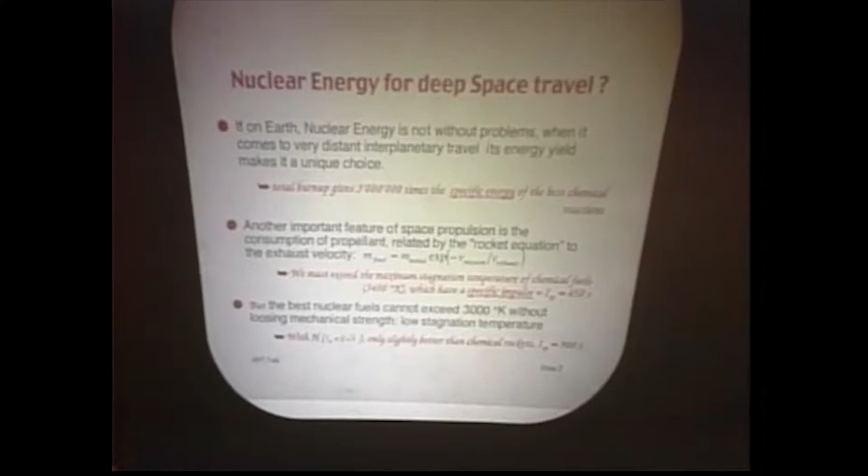Now, if you wish to make the jump from going to the Moon, 300,000 kilometers, to going on to Mars, where the round trip is 1 billion kilometers, you have to introduce some substantial change. You just cannot use the same technology over again.

And the real question is, can you use—this projector is not up to MIT standards. It's totally out of focus, and there's a lot of aberrations. Okay, now I'd say it's up to Harvard standards.

Anyway, the question is, can you use nuclear power? You can certainly convince yourself nuclear power is interesting in a certain sense because it offers 3 million times more specific energy than a chemical reaction when you burn it all. But energy is not the problem when you travel in space—what's important in space propulsion is impulse, momentum, speed. There's a famous rocket equation which determines how much stuff you can get there when you start with a certain initial mass. It's a simple equation containing the sum of the speeds you have to add for the various operations, divided by the exhaust speed of your gas.

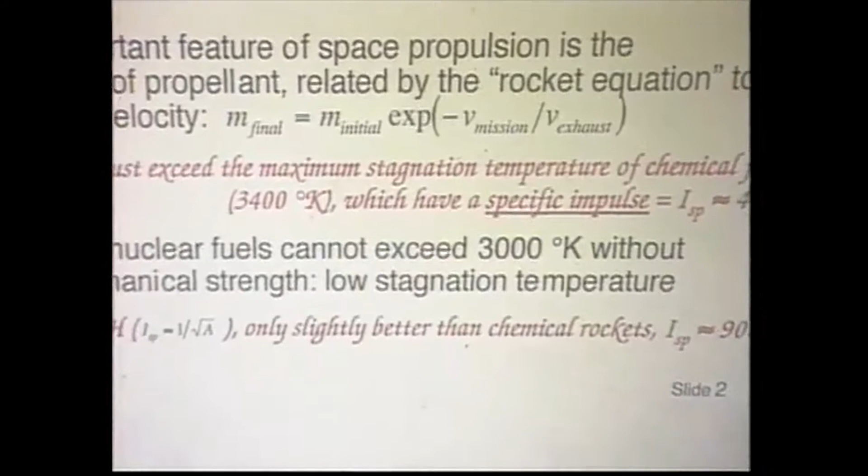That is essentially fixed by chemical fuels, which can reach a temperature of that order and provide a specific impulse of about 450 seconds. The specific impulse is essentially the amount of time, measured in seconds, over which a fuel will apply a thrust equal to its weight. So if I have a kilogram of a certain material and burn it, it gives me a kilogram of thrust for so much time, and that time is the specific impulse. So if you have a kilogram of chemical fuel, it provides a kilogram of thrust over 450 seconds, and that specific impulse is proportional to the speed of exhaust.

Now the idea is, of course, to go nuclear. But nuclear systems are limited in temperature — you cannot even get to the temperature of the gas, because your reactor materials cannot withstand such high temperatures. So you do it with a thing called NERVA, the machines developed in Russia and the United States, reaching about 900 seconds. But that's not because you have a higher temperature, simply because you're using hydrogen, which has a lower atomic number, so molecules move faster, giving you a higher exhaust speed.

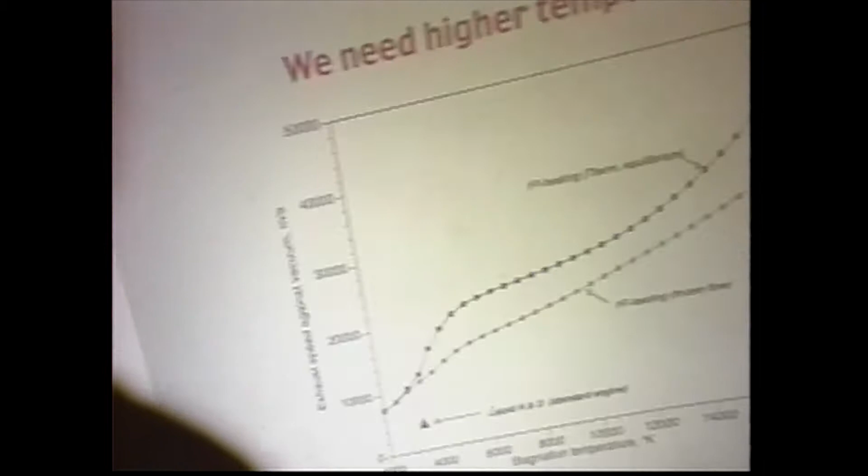This is a little bit the situation: if you look at the standard, here is the stagnation temperature at which your system is operating. Here is liquid hydrogen and oxygen, giving you an exhaust speed of about 4 kilometers per second, so a specific impulse of about 450.

We're talking about systems which should allow you to reach temperatures typically between 10,000 and 15,000 degrees, with hydrogen exhaust, giving specific impulses in the region between 2,500 and maybe 4,000. So we're talking about an order of magnitude improvement in specific impulse compared to a normal chemical system. A factor of 10 in speed means a factor of 100 in specific energy — let's be clear about that.

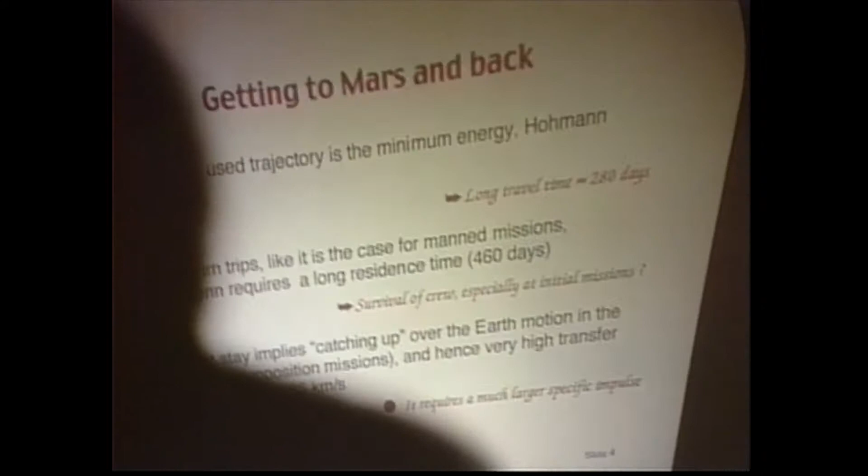That, of course, makes the situation much easier when you try to go to Mars. In fact, the most used trajectory is the so-called minimum energy trajectory, called the Hohmann trajectory, which was proposed initially in the original document, the book I mentioned before. The travel time is long, 280 days. It's essentially a free-fall trajectory, as you'll see in a minute.

However, if you get there and want to come back, you have to make sure the planets are in the right place, which means adding another 460 days residence. So it's a fixed trajectory: you travel for a year, stay there a year and a half, then come back for a year. If you miss the opportunity, things aren't in the right place and you don't get anywhere. Now if you want to go a little faster with this, you have to...

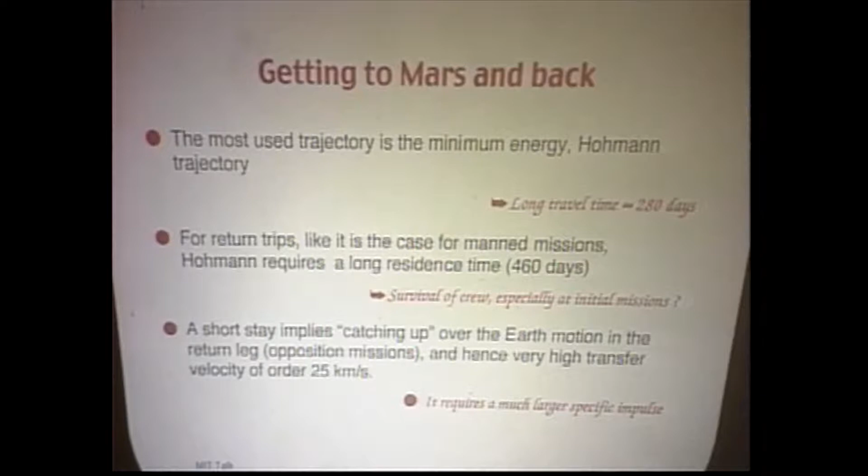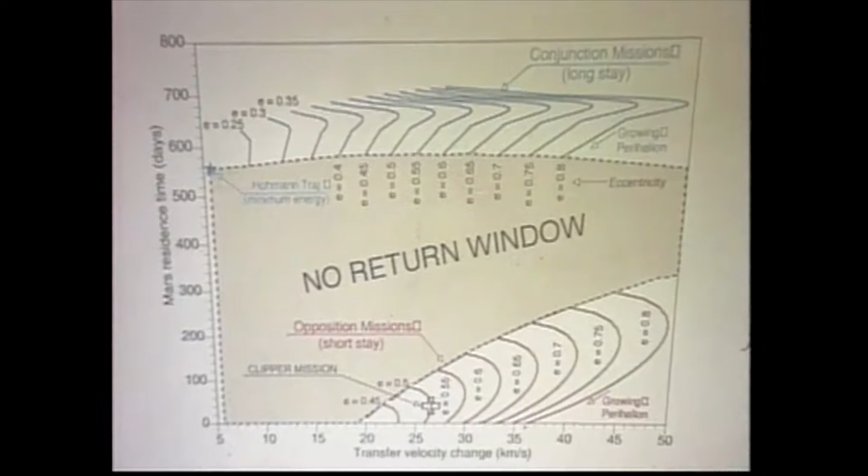If you want a much shorter mission, you have to use an opposition trajectory — in other words, you have to run after the Earth, which is escaping away from you. That implies you have to go to much faster speeds. This is the area which is permitted; there's no other way in between. So if you have very slow motion, 5 kilometers per second, you'll be forced into the long trajectory. If you want to stay there for less time, you're obliged to go to transfer speeds which are quite large, 25 to 30 kilometers per second.

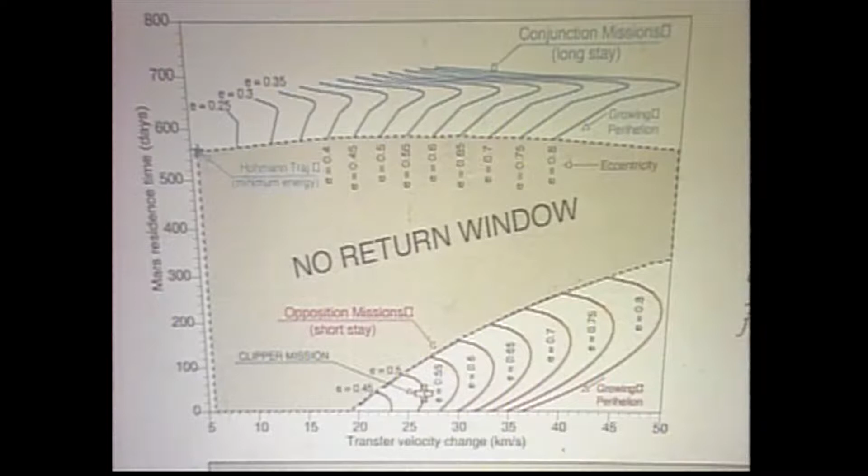Which implies, of course, speeds of your ejected gas of the same order of magnitude, and therefore you require new methods. We are talking about missions of this type for the manned clipper missions, and missions of that type stay there for the case of transporting materials. Now, let me show you briefly how this mission can be realized.

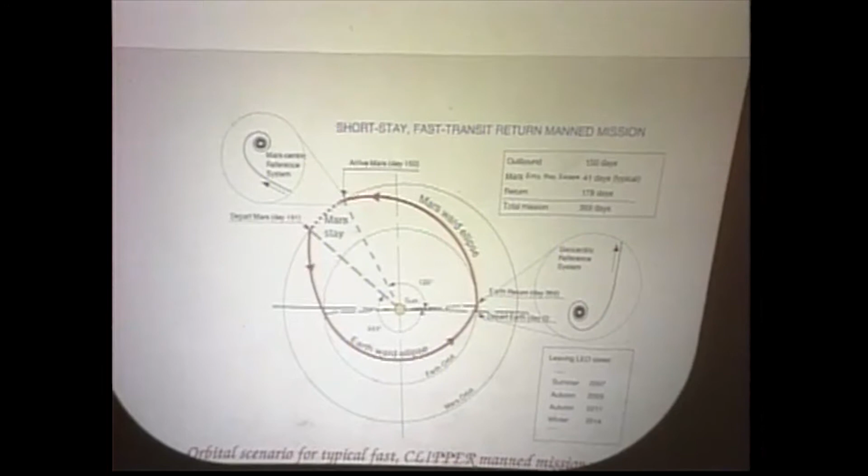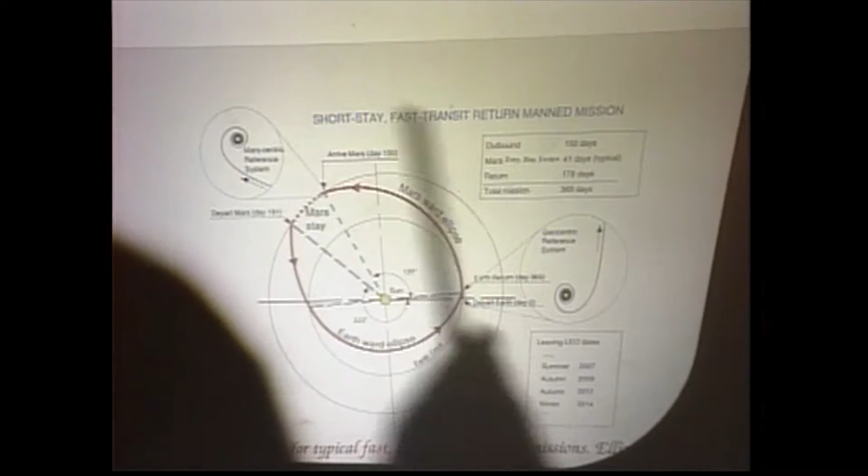The fast mission consists of leaving Earth here, running on this trajectory, and getting here after 150 days on Mars. Then you stay on Mars as long as you wish, from 0 to 100 days or whatever is required. Then you decide to come back. This time Earth has gone further, so you have to catch up the Earth position, running much closer to the sun and then making a turn inwards. That allows you to get back in something like another 179 days. So you can close the whole thing in a year, but it requires much higher speeds.

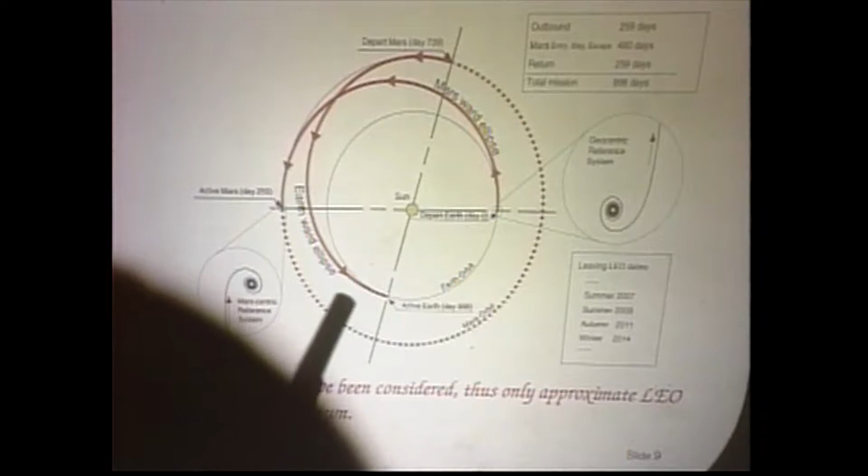This is for the people who want to get there. Now if you want to send equipment, as you probably need anyway, you can follow the Hohmann trajectory, represented here. You can see what the Hohmann trajectory is all about—it's a half circle. You start here, you go in 280 days to Mars, 260 days. Then you have to stay all this time until the Earth is in the right position. Then you leave here, and go another Hohmann trajectory back, 180 degrees, and you hit the Earth where it belongs. That's the long time trip.

Now we are trying to study all kinds of different missions with the potentialities of this new engine, which I'll describe in a minute. Essentially, nuclear power is going to be used only for the transplanetary trip. Classic methods for landing and takeoff, so you use standard fuel to get to orbit and then to come down. Air braking is being removed at this level—it's an extremely complicated procedure. Imagine you arrive on Mars and then have to get into a sort of orbit which is slowing down into the gas of Mars, and the window is very narrow. The difficulties of doing that are considerable. In fact, many of the problems in getting Mars material come from that point. We think that with people you should avoid it.

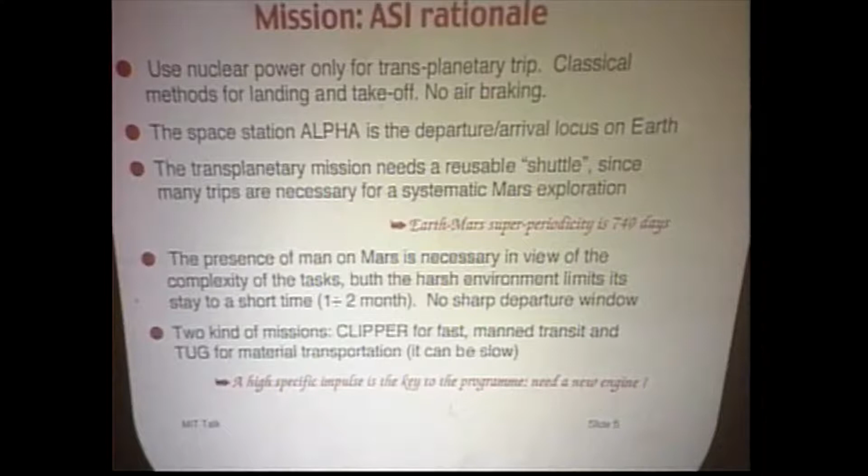The Space Station Alpha is used as a departure point. The transplanetary mission needs a reusable shuttle, since many trips are necessary and could be necessary. This device will operate on a periodicity of Earth-Mars orbits, which is 740 days. The question is the presence of man on Mars—so man is necessary for the complexity of the task, but the harsh environment limits the stay to a short time. It's inconceivable that you could leave a person on Mars for the first time for 1.5 years, eventually to make his own fuel and come back and so forth. So he has to be able to go there to get the equipment going, but then he has to come back, and you need no sharp departure window.

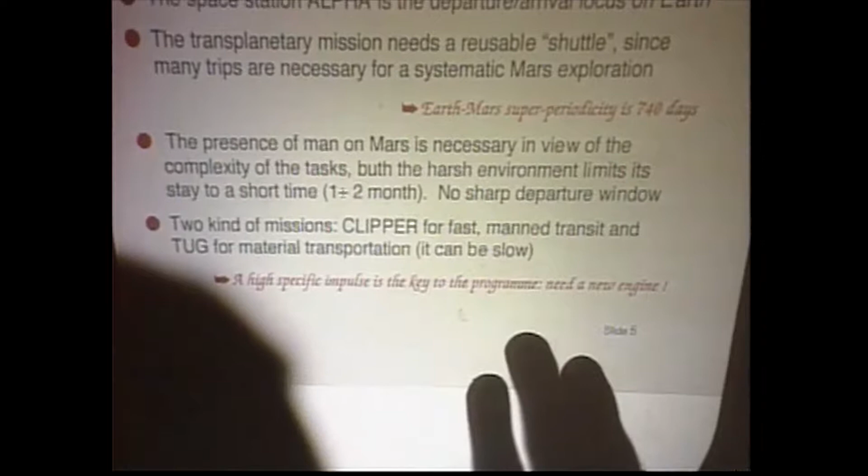And then you have two kinds of missions: the clipper for fast manned transit, and the tug for material transportation, which can be slow. And the key, of course, to all of that is a higher specific impulse.

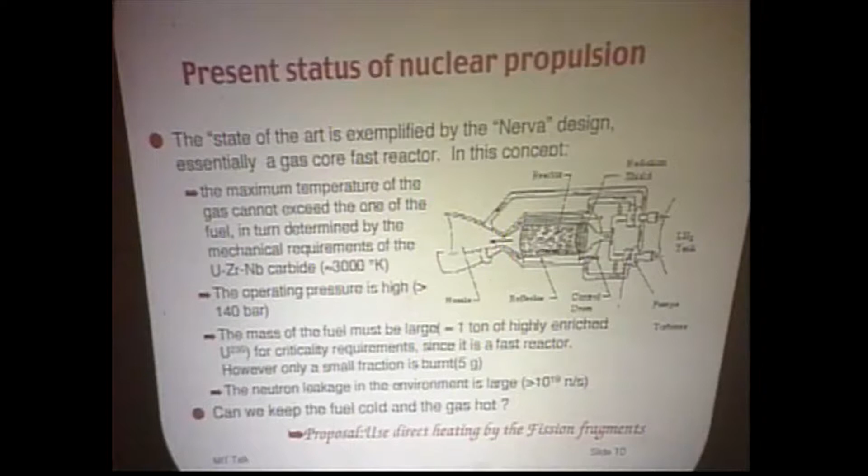Now the present state of nuclear propulsion is not a very good state. Essentially, NERVA is the design which is now the best in town, and it's essentially a gas core fast reactor. The maximum temperature is determined by the temperature of this uranium, zirconium, niobium carbide, which has to remain solid. It runs at high pressure because the gas has to go from here to there. Here is the low temperature, here is 3,000 degrees, so it has to warm up going through the rods of the reactor. So high operating pressure—the mass of the fuel must be large. It's 1 ton of highly enriched uranium, which has to be put into orbit in order to get criticality.

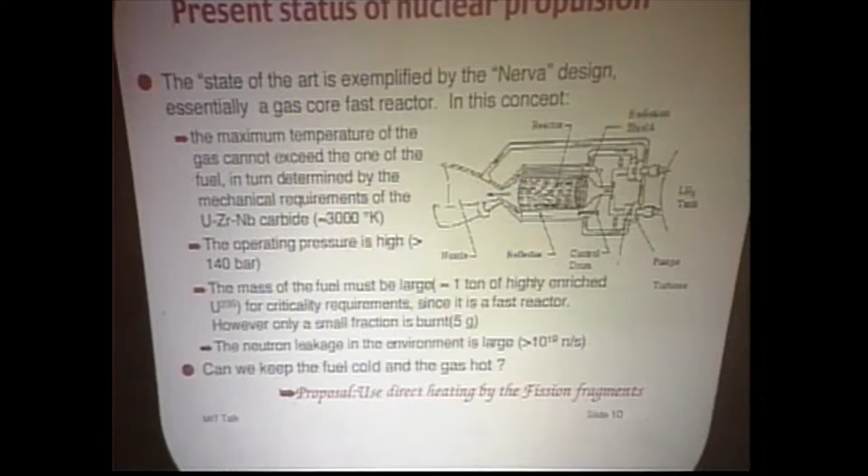But however, during the burning of this whole system, only 5 grams are burnt. The rest just goes there—you have to deliver it, get rid of it. And many people get very nervous when you put a ton of highly enriched bomb-grade uranium into orbit. Neutron leakage is very large, 10 to the 19 neutrons a second, so it makes it very hard for people to stay around. They have to be shielded, and even if they get shielded, it's not trivial—you can't avoid that kind of irradiation from these fluxes.

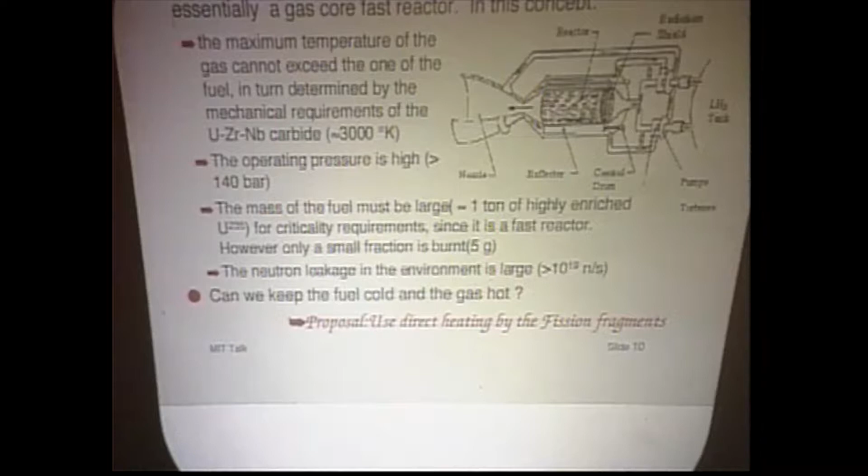The real problem is that essentially the fuel is, in fact, the hottest part in the system. Now the basic idea is, can we keep the fuel cold and the gas hot? That's what you would like to do.

The answer to that is a very simple idea, which we are working on: direct heating by the fission fragments. Let me remind you that 88% of nuclear energy due to fission is carried by two fission fragments, the rest being additional neutrons and gamma rays. You have essentially uranium-235, you swallow a neutron.

The uranium-235 starts to vibrate, to move. It separates like 2 drops of water. You get 2 little droplets. They're both positively charged, therefore they repel each other. No longer are nuclear forces present because you have severed the connection between the two. And the 200 MeV you recover is just simply the Coulomb repulsion of these 2 parts. So 2 fission fragments come off and they carry essentially 88% of the total kinetic energy.

So why not use it? In addition, there are a few gammas and neutrons, but they carry only a few MeV. So most of the energy is carried by these 2 fission fragments, which are back-to-back, so to speak.

Now the question is, how can you make use of that fission fragment directly? They have an enormous enthalpy inside, they represent tremendous high temperature, but you never see them in a reactor because they stop in the reactor, and you just get warming up of your material. You don't get access to that beauty that nature is providing you with.

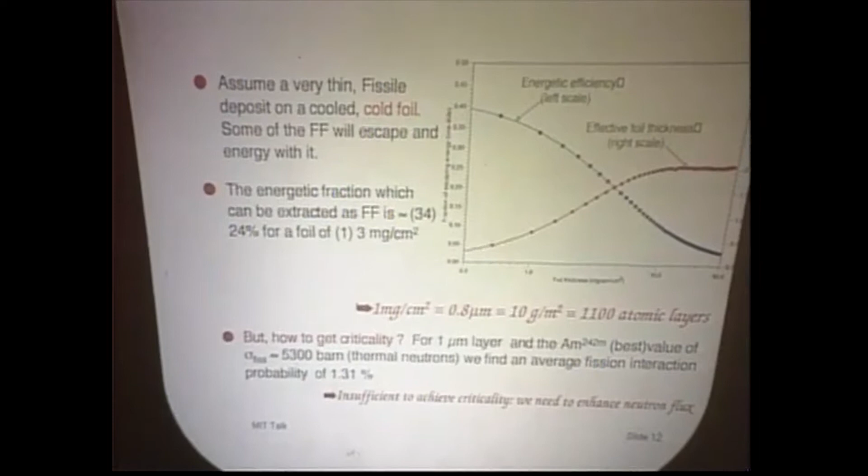So we assume a very thin fissile deposit. Let's take a foil, put on it a layer of fissionable material, and make it thin enough so that the fission fragment can come out. Then see what happens as a function of the thickness of the foil.

Here you have a plot which shows 1 micron, 1 milligram per square centimeter, 10 milligrams per square centimeter. This foil is made out of uranium or americium or whatever you want. And you see here the energetic fraction of energy coming out.

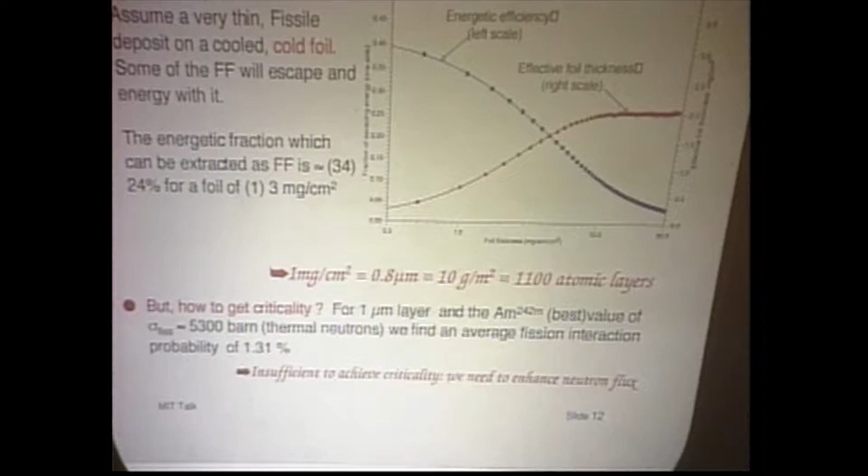Obviously, you get 44% if you had 0 thickness, because 88% is fission fragment, 44 going one direction and 44 the other. Then when the thickness becomes bigger, you get a loss. For instance, if you have 1 micron thickness, you get 34% instead of 44. If you go to 3 microns, milligrams per square centimeter, you get 24%.

Now, what are we talking about here? We are talking about 1 milligram per square centimeter, which is 0.8 microns in thickness, which is 10 grams per meter squared surface, and we're talking about 1,100 atomic layers. This is certainly not what you call a nuclear fuel. A nuclear fuel is a very heavy material, hundreds of tons of stuff inside the system. Here it's rather a radioactive source, if you like, deposited on a thin layer.

Now, how do you get criticality? For that, you need to do some clever things which have to do with neutronics. Let me anticipate to you that I do succeed in having criticality with that little bit of americium.

Now, let me be clear about numbers. If I take this americium, which has the largest fission cross-section known around, 5,300 barns, and you get neutrons through that, it has 1% probability of interacting. Obviously, you'd like to have 100% probability of interacting to keep the reaction going, and therefore you need about a factor of 100 enhancement. So can you enhance the neutron flux with some kind of storage device so that you can get the neutrons over and over again through your americium foil, and enhance this way the probability of fission?

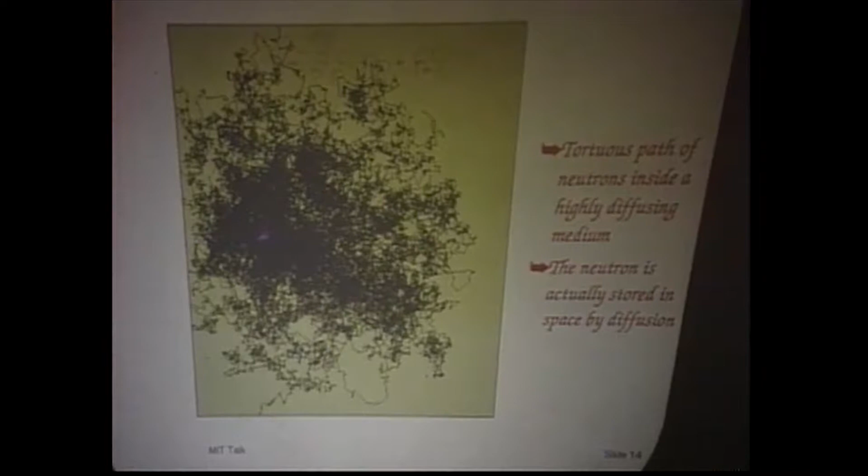The answer is yes. We've done lots of experiments at CERN on that, and in fact this is not just a theory, it's experimental results. The basic idea is you take a highly diffusing but neutron transparent medium, and you let a neutron travel in it. Only elastic cross-section is there, no inelasticity. So this neutron moves around inside this material in the same way that an electron moves in an argon gas.

The physical reason is very similar. Normally, you're talking about nuclei which are double magic - we have here the great experts for these things. A double magic nucleus is like a noble gas, the shell is closed. So in the same way an electron cannot be captured in argon or helium and will go around as a free electron forever, here we're talking about the nucleus - the neutron will not be captured by the nucleus because the shell is closed. The cross-section is very small, and the result is this thing will just go around.

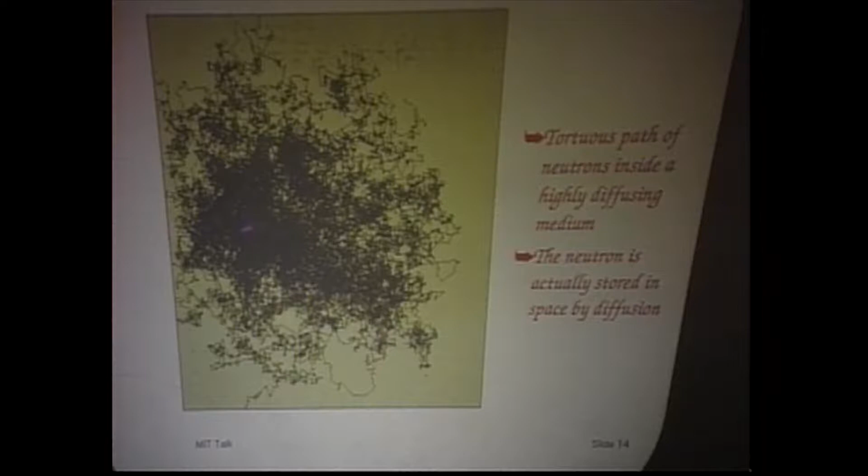Look here, there's a single tortuous path inside the highly diffusive medium. This is computer simulated, but reality is not any different. The neutron is essentially stored not like in a storage ring, it's stored by diffusion. It's a random process, but effectively it keeps the neutrons together. It has been shown that a 60 meter long path is wound into 35 centimeters, 1 foot in length, and this is due to the fact that this movement is random.

Now, in such a storage medium, you have a volume of this type of high purity graphite or high purity lead. In that volume you have this phenomenon. In such a storage medium, because of multiple trials, even a very tiny amount of impurity can absorb a significant amount of capture elements. Suppose you have a ball full of water, and you put there a little bit of ink, just a little drop of ink.

The whole box will have the color of the ink, even if the amount of ink is infinitesimal, because the water is transparent and the ink is highly absorptive. Sooner or later, light will find the molecule of ink and send back the color you put in. Same thing happens here - you have a very small amount of impurities inside this medium, and because you go around and around over and over again, you'll eventually hit an impurity, and you get a factor because of this multiple trial effect.

And therefore, 20 grams of americium inside that box will make it critical. So now you can make devices which are critical with grams of material, not kilograms. Remember, in the NERVA you needed 1 ton of highly fissile bomb-grade uranium. Here, with 20 grams of americium, you're critical in this continuum medium.

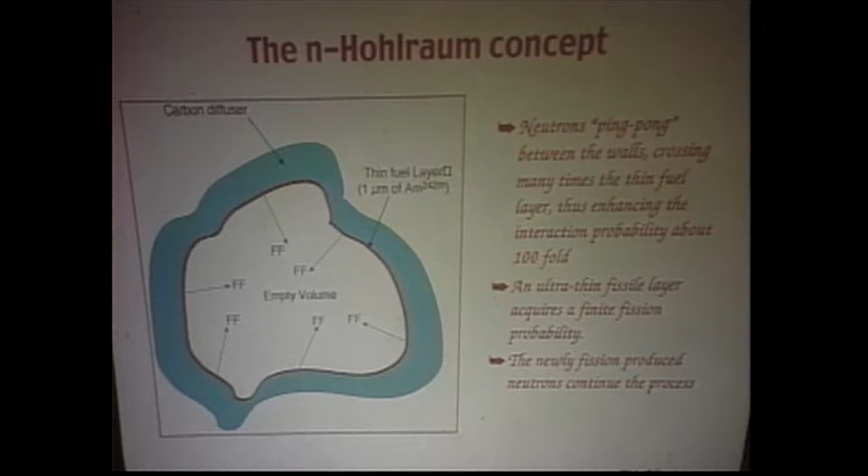Now, of course, you don't want to have a continuum medium, you want an essential way to do this fission. So we introduce a statement which we call 'Hohlraum,' because it reminds of a black body - essentially a box made with high purity carbon diffuser, on which walls you put a thin layer, 1 micron, 1,000 molecular layers of americium. Then neutrons will ping pong between the walls of this container, traverse the walls many times, and it will enhance the interaction probability, as we'll see in a minute, about 100 fold.

And the ultra-thin fissile layer acquires a finite fission probability because of these many traversals, and the newly produced fission neutrons will get thrown back into the box, and it will start again. More precisely, we assume the empty cavity is covered with a layer. The configuration is similar to a black body radiator. Let me remind you, for a black body radiator the flux is uniform independent of the shape, and the flux is determined essentially by the properties of the material, not by the geometry. The same thing will also happen here.

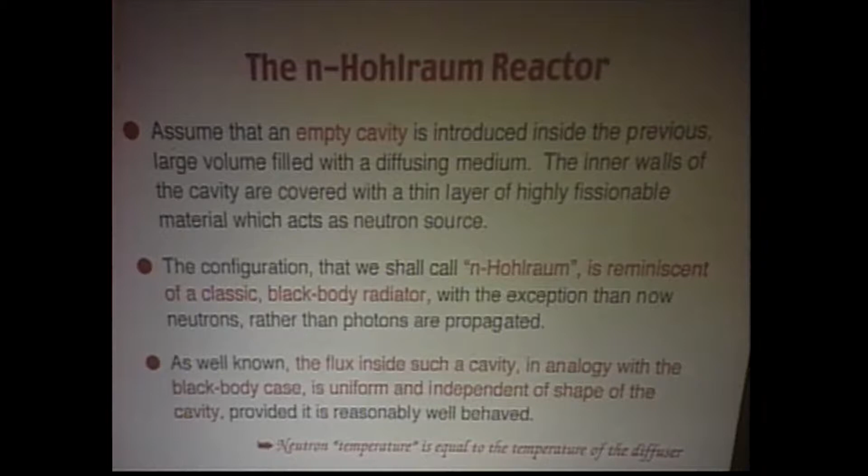It's uniform, independent of the shape of the cavity, provided of course it's well behaved, and therefore it doesn't matter what the shape is, you will get this result. Also, the neutron temperature, and therefore neutron energy, will be related essentially not to the fuel, but to the quality of the container. So the temperature will be fully thermalized with the temperature of your container, and you'll know very precisely what energy neutrons you're dealing with. And of course, no neutron will come out, because being a black body, it will contain the neutrons inside - if they're inside, they're not outside.

Now, the theory of enhancement can be easily done. I won't spend much time on this. It tells you that if you have any shape, take the reflector away, then put it back with the same source, the enhancement of flux because of the reflector is equal to the square root of the elastic scattering divided by the capture cross-section. Scattering elastic is typically 10 barns, capture cross-section is on the order of millibarns, so we're talking about a ratio of 10 to the 4, 10 to the 5 between the two numbers. When you take the square root, you get good results.

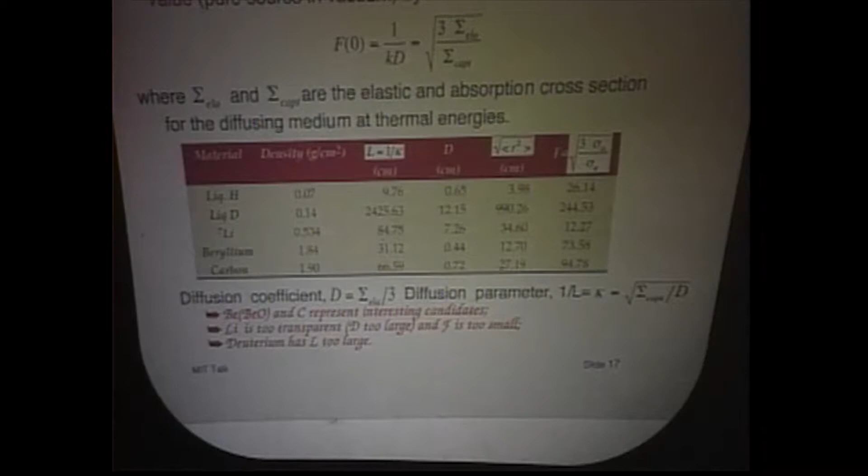There are two important parameters here. One is the diffusion length, which means the size of your sphere of containment, the thickness of the walls needed to do the job. The second is the enhancement factor, by how much you increase the flux.

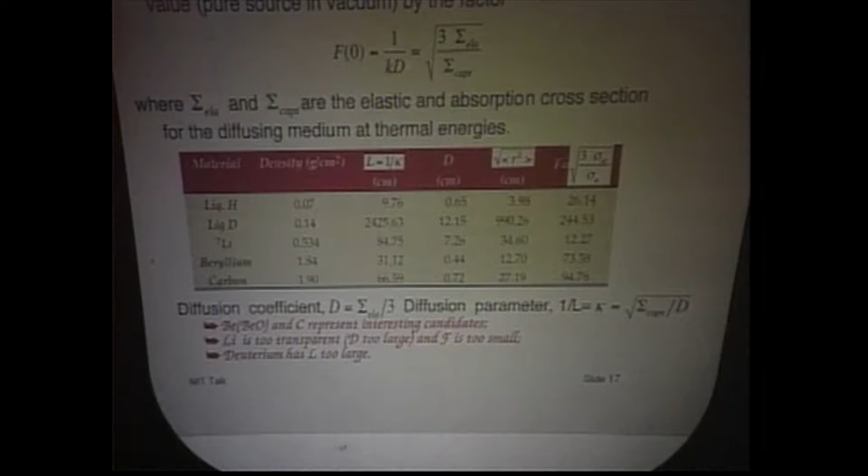If you use graphite, you get 27 centimeters diffusion length and 94 enhancement. Beryllium works fine too - it's much smaller, 12 centimeters, but the enhancement factor is only 73. Lithium is completely transparent. Liquid deuterium gives an enormous enhancement factor, but also a very long diffusion length, so you'd have to build a huge device - not practical. Liquid hydrogen is also excluded. So essentially you end up with beryllium, beryllium oxide, and carbon as the interesting materials.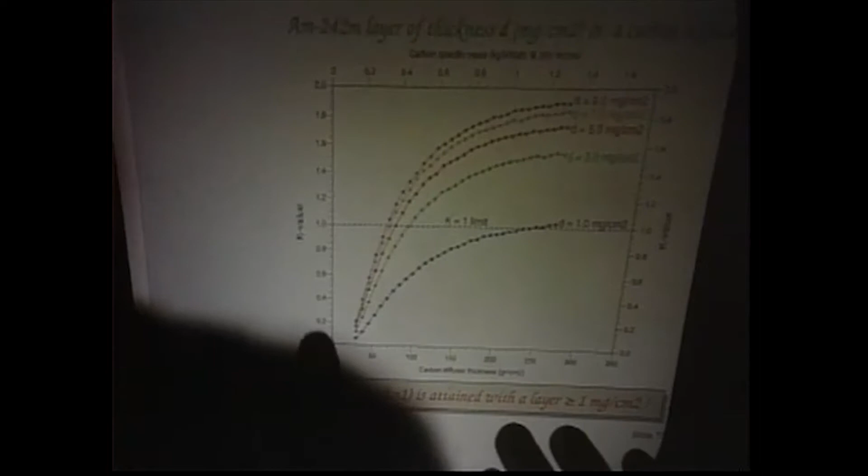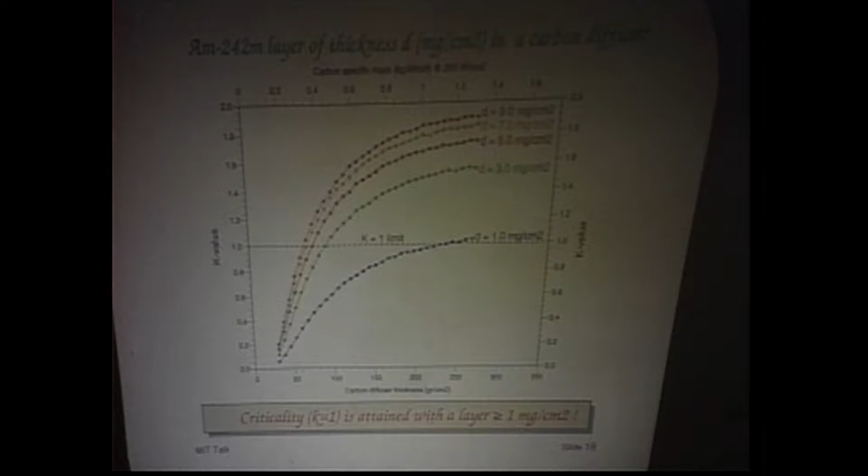But if I go to 3 milligrams, you see I'm already at 75 grams per square centimeter, which means about 35 centimeters - that much. This is 22 centimeters, about what you'd encounter flying over the Atlantic. That's 22 centimeters, so it's quite a reasonably small amount of reflector.

Beryllium oxide can do it even better - criticality is obtained with layers of only a few milligrams per square centimeter. So it's possible with this technology to make a critical reactor operating with a very small amount of material. Remember, 1 milligram per square centimeter is 10 grams per square meter of surface. We're talking about probably 100 square meters for this mission, so between 5 and 10 kilograms of americium to burn, which is not very much.

In fact, americium has the same property as uranium-235. Plutonium-238, used now on the Cassini mission and on Voyager, usually had more than these kilograms on it. So it's déjà vu, as one says in French.

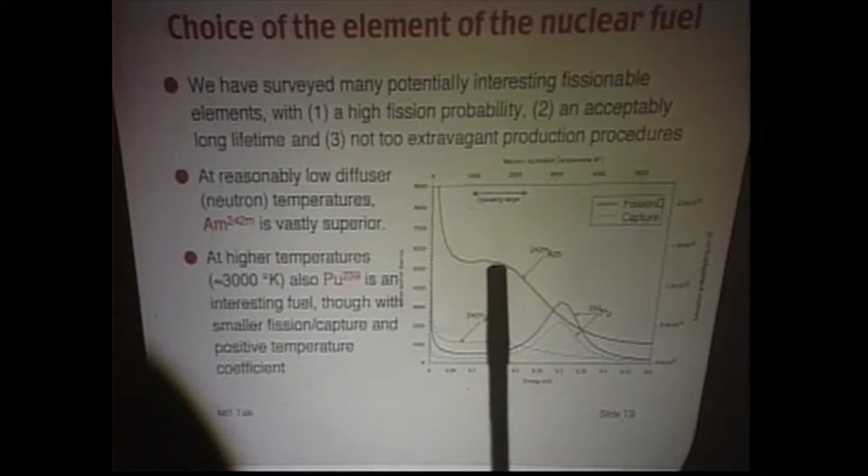Now, quickly, which fuel element should you use? You need a high fission probability, a reasonably long lifetime, and not too extravagant a production procedure. Americium-242M is an ideal candidate. This is the cross-section - notice it drops as temperature goes up. This is the temperature of your whole run, 1,000 degrees, 2,000 degrees, so you're operating in this region corresponding to those energies: capture very high, fission very high, capture very small - a big ratio between the two.

The other element, not so bad, is plutonium-239, which has a well-known resonance at about 0.24 electron volts. That could be used if you built a container with a high temperature, on the order of 3,000 degrees. In that case you could also use plutonium, but you'd have a problem with the temperature coefficient - though there's a nice negative temperature coefficient here because of this cross-section. So plutonium is the second choice, americium is the first choice.

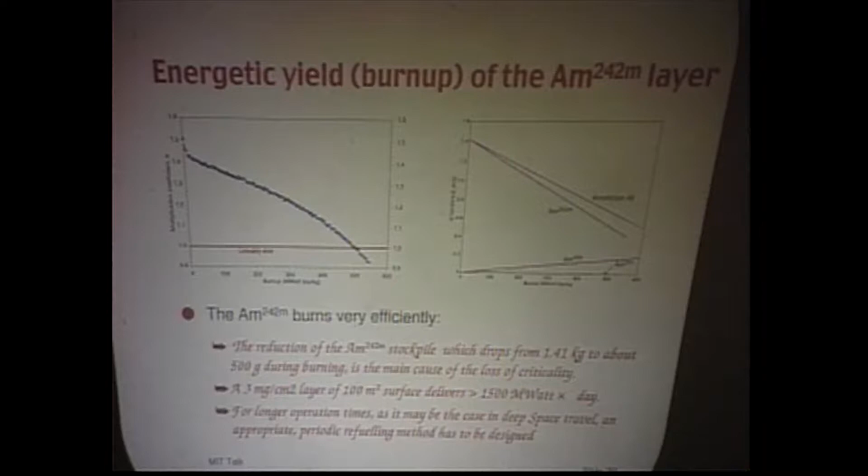So I've done a very complete burn-up analysis for a reactor of this type - I won't spend time discussing it in detail. Here is what happens when you take 1.4 kilograms of that americium and burn it: you can achieve a fairly long burn-up.

Burn-up means megawatt-day per kilogram. This means 1 kilogram will give you that many megawatts for that many days. So 1 kilogram here will give you 400 megawatts for 1 day, or 1 megawatt for 400 days, which is much bigger than what you get for a normal reactor.

In a normal reactor, you get a burn-up of 20, 30 in those units. This essentially comes from the fact that the system is much more efficient when it comes to burning.

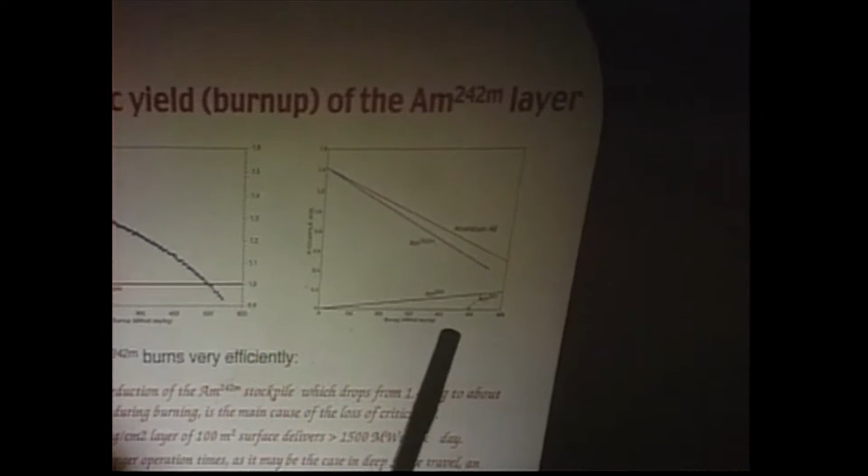For instance, here you can see during this 500 megawatt-day per kilogram, the americium coming down from 1.4 kilograms to about 0.5. Americium being burnt, americium-243 produced by the captures, since it's a clean situation, and here it stops because it gets below critical.

And so you can get a lot of energy out of this. You can burn about half, even more than half of your americium can go. And 3 milligrams per square centimeter layer delivers that much power.

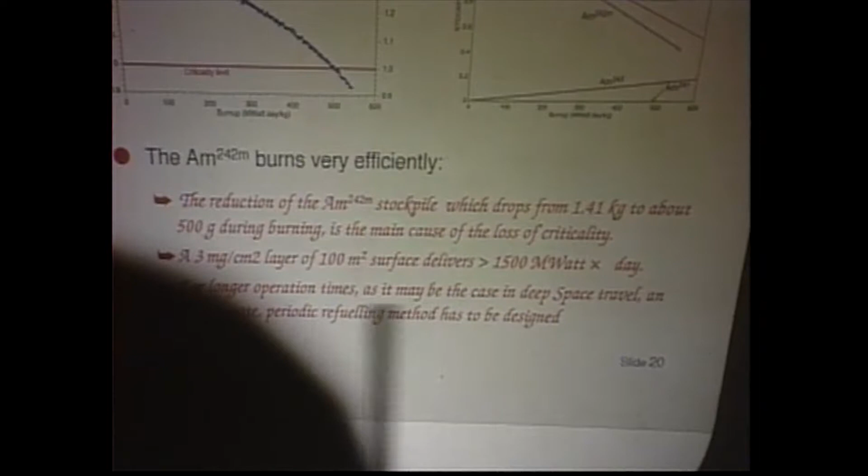And of course, if you want much longer operation, you have to remake your layer. It's a very thin layer. It can be deposited in some kind of a way. The whole technology has to be developed. But obviously, periodic refueling may have to be envisaged eventually.

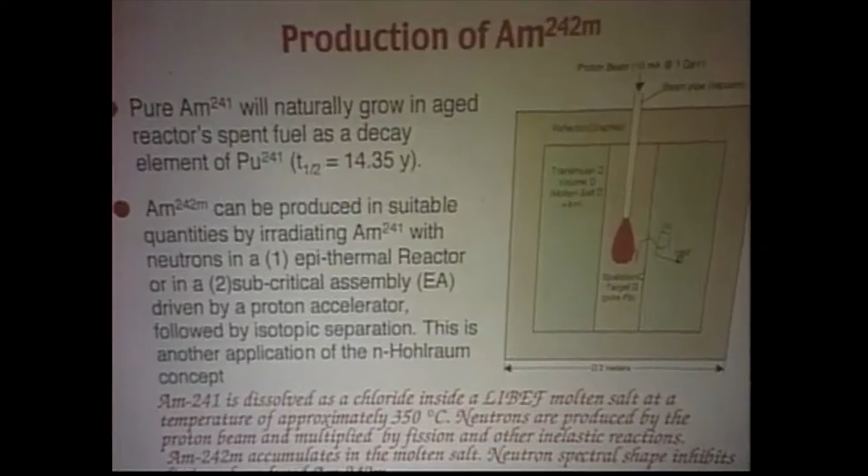Now, how do you produce the americium very rapidly? Well, essentially, you start from americium-241, which is naturally grown in aged reactor spent fuel. Plutonium-241 has a lifetime of 14 years and goes into americium. And then you make a neutron capture.

And here is explained how you do the neutron capture. And then you get an extra neutron, and you end up to 242M. 242, not M, is not stable. And so the only thing left is that one.

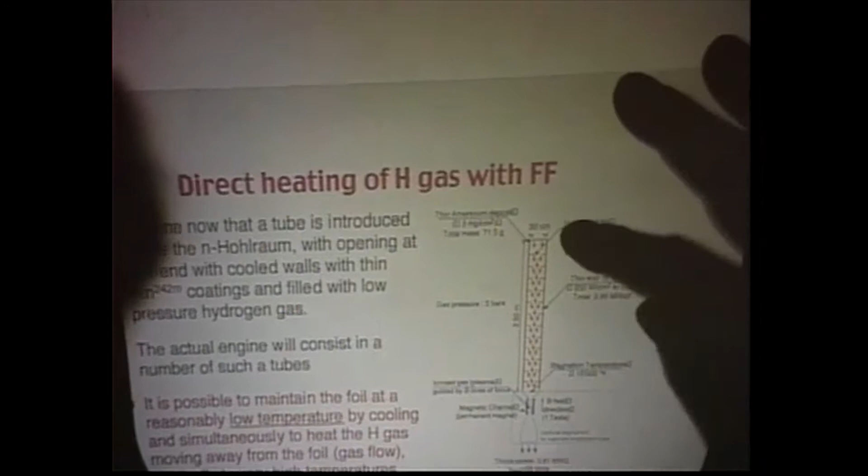So let's come back to the question of heating of the gas with those fission fragments. Let's assume we have a tube, typically 2.5 meters long, 30 centimeters in diameter. This is like a fuel rod in a reactor. Only a fuel rod in a reactor is full of material, and the cooling is outside.

Here we are talking about a fuel rod which is empty. And the fuel, instead of being deposited as a volume, is deposited as a surface inside. And then we get gas in, and the gas goes through this thing, and it gets heated up. Let's see what happens here.

You have a tube, 30 centimeters in diameter, in this particular case 2.50 meters long. There is a thin wall, which is cooled from liquid from outside, and produces 2 watts per square centimeter of heat, and produces 3.95 megawatts of power. This rod is immersed, as you will see, in a lithium bath.

On this wall, there is americium, 3 milligrams per square centimeter. The total mass is 71 grams, so it's not very much. And there is a little bit of gas flowing through the system, 1.2 grams per second, so 58 micrograms per square centimeter, so it's very slow flow gas. The whole thing is taking 1 gram of gas per second.

And the gas is flowing very slowly. It leaves the wall, it departs from the wall. When it departs from the wall, it warms up. And when it comes down here, you will see from exact calculation, it has temperatures of the order of 10,000, 15,000 degrees. And in fact, the wall is cold, and the gas is hot.

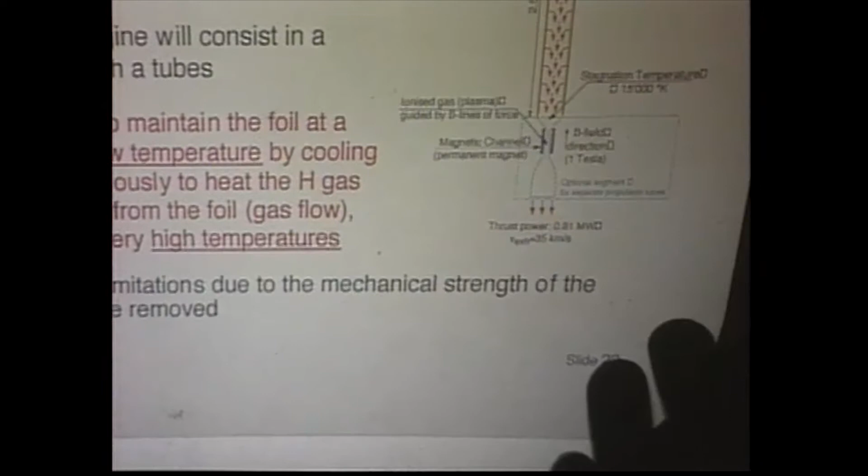So it's maintained, this is my statement, maintained the foil at a reasonable temperature, cooling from outside the wall, the sheet, the foil, and the gas is moving from the wall, and when it gets in, it gets hot. And by the time it comes down there, it goes between 10,000 and 15,000 degrees.

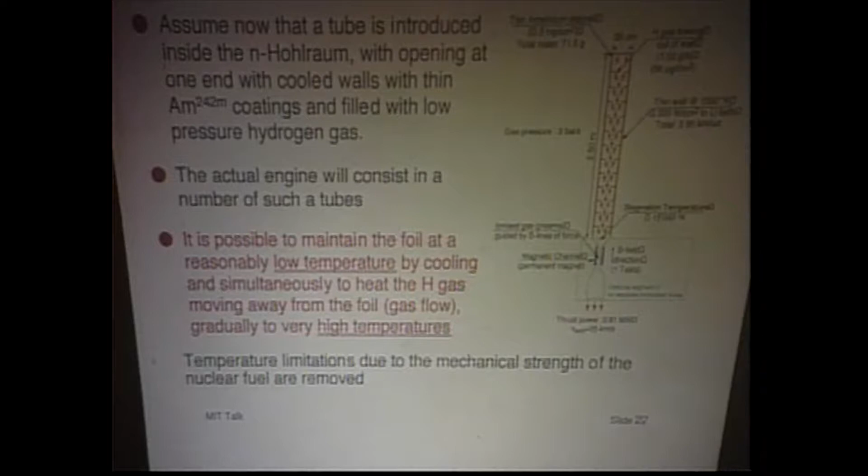And see now which limits there are and how can you get there. Now, temperature limitation due to mechanical strength of the nuclear fuel are removed because the fuel is cold and the gas is hot. Now, there are several gifts of nature in here which are worth reminding you.

First of all, the range of the fission fragments exiting from the 3 milligram material can be calculated for the actual Z and A distribution. And it turns out that the specific ionization per unit of mass in hydrogen is much greater than in americium. There is almost a factor of 20 higher specific ionization loss in hydrogen with respect to americium.

What is due to that? What's the cause of that? The cause is the following: ionization losses only work when the particle traveling is faster than the electron bound in the atom.

And the fission fragment has beta equal 0.04, 4%. So many of the electrons bound in the americium foil have a speed which is higher than the speed of the fission fragments, and therefore they are essentially not participating in the ionization loss.

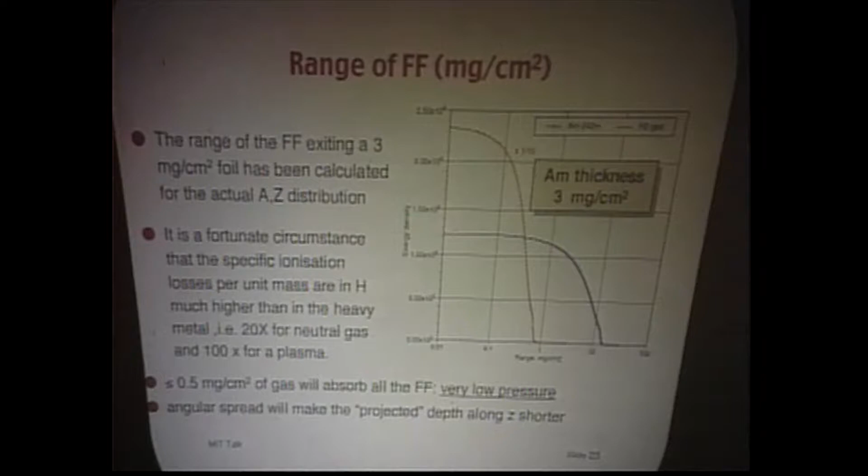Which is in fact extremely important. So even half a milligram per square centimeter of gas will absorb the fission fragment completely. So you can operate with very low pressure. Actually, in reality, the fission fragment goes in all possible directions, so the range is only the upper limit to the travel.

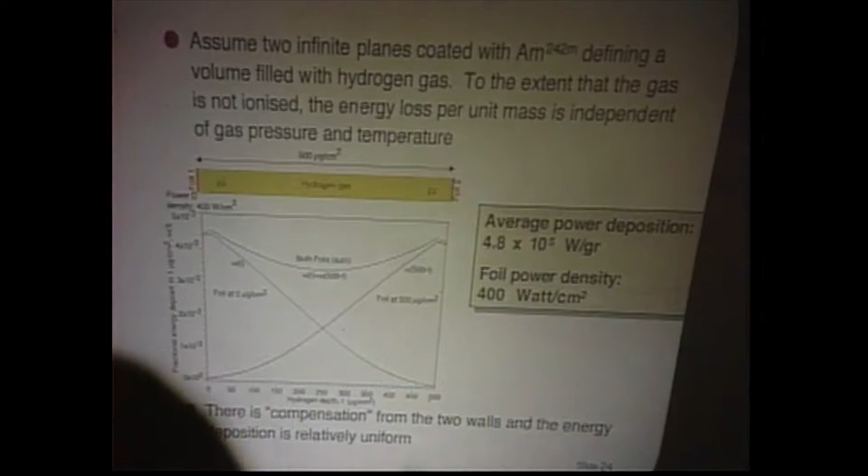So let me take two infinite planes coated with americium, defining a volume filled with hydrogen gas. So you have two planes here, and these two planes are now filled with gas. The fission fragment traversing it, the thickness is half a milligram per square centimeter, so it's about 20 centimeters, 3 atmospheres, just to get ourselves understood, even at high temperature.

This is the kind of heat produced by the wall to the left, and this is the kind of heat produced by the wall to the right. When you put them together, you get a reasonably flat distribution. The important number here is this simple one-dimensional drawing, which will in fact be worse than the case of the tube, which I'll discuss in two dimensions in a minute.

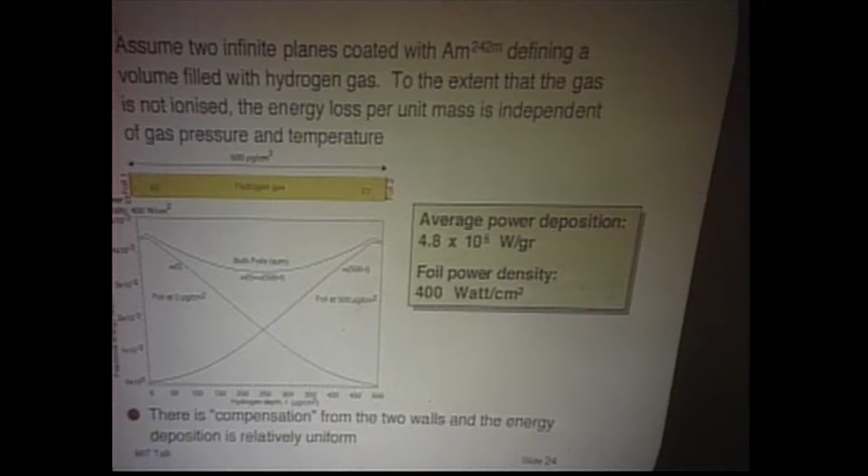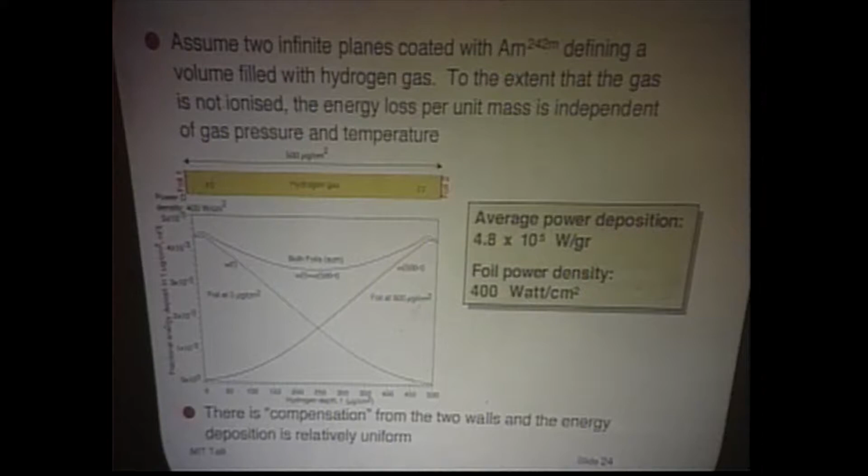With 400 watts per square centimeter on this foil, you get about half a megawatt per gram in the gas. Now a megawatt is an enormous power. A megawatt in a gram is just putting a megawatt on a mosquito, and obviously if you put a megawatt on a mosquito, it will fry very rapidly. Therefore, the idea is that you can keep the foil under very normal conditions of a reactor, but get a real hell inside the gas.

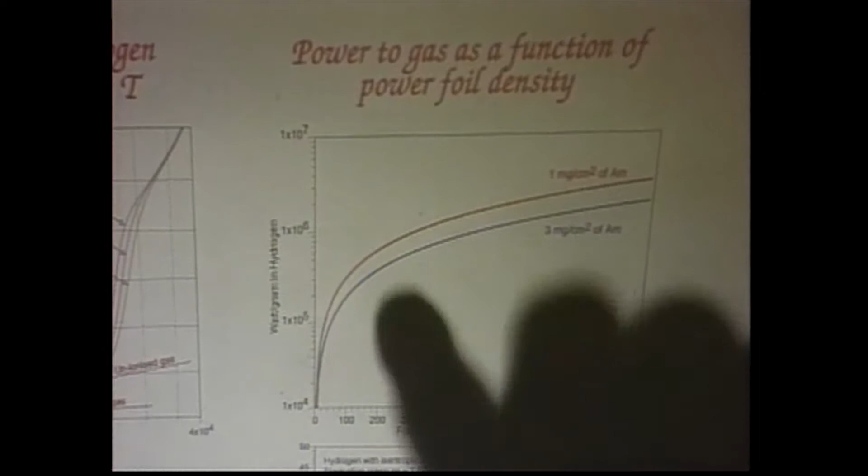This is the kind of region in which a normal reactor is operating. And you can see that you can go all the way up to about a megawatt per gram in the gas with reasonable heating on the walls.

And that is, of course, transformed into temperature through the enthalpy diagram for hydrogen, where you have enthalpy, 10 to the 5, 10 to the 6, in joules per gram, and temperature here, 10 to the 3, 10 to the 4. Now you have to pay a little attention to this curve. Up to 3,000 degrees, the enthalpy is rising linearly. This is a perfect gas: enthalpy, specific heat is constant. It's essentially the temperature of single hydrogen molecules.

At about 3,000 degrees, the molecule dissociates, becomes atomic. Then you get the enthalpy to do the dissociation - that's like a chemical reaction, you put energy into it, eventually it comes back after you've done it. Then you start with another slope, which is twice as sharp, because you have twice as many atoms there, and therefore a higher specific heat contained for a given gas.

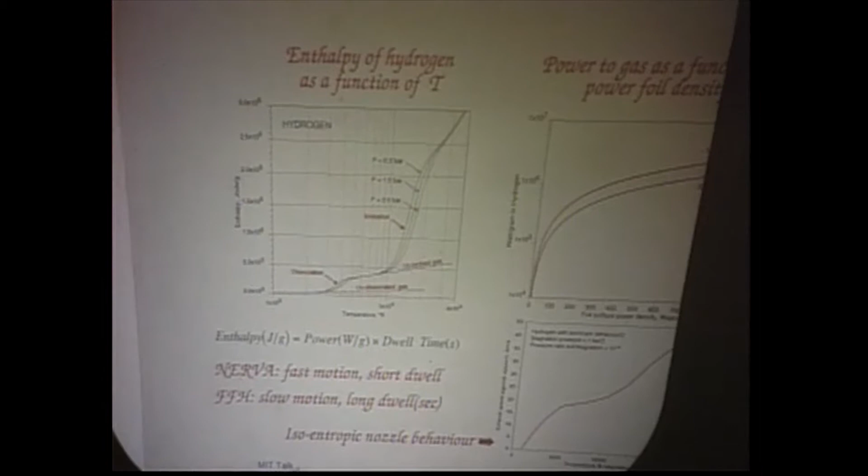And then you get to about 10,000 degrees, and when you get there, the gas gets ionized, and then you are getting the 13 electron volts of ionization. Remember, 10,000 degrees Kelvin is 1 electron volt, but here we are talking about recovering something like 10 electron volts. Therefore, the enthalpy grows tremendously, even if the temperature doesn't go very high.

Essentially, you are now talking about enthalpy, joule per gram, equal to power, watts per gram, times dwell time, the time under exposure, the time gas takes to come out of the container. Typically we're talking about several seconds in this machine. So seconds multiplied by megawatt per gram equals gigajoule per gram, which is right here.

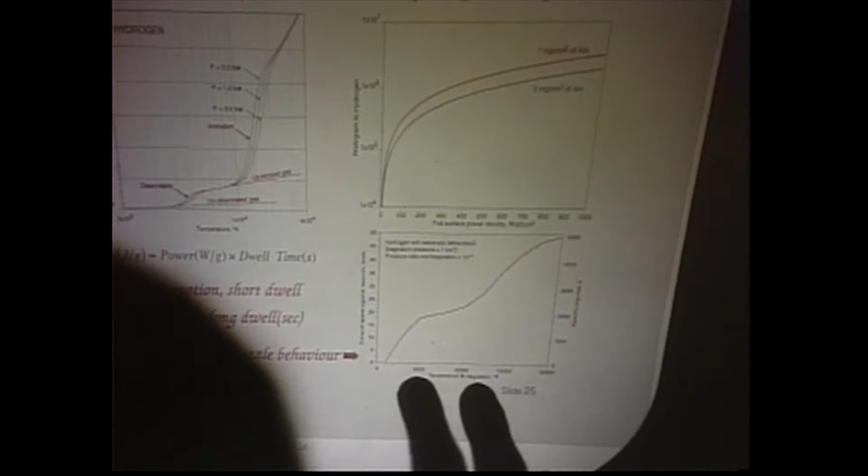So we're talking about temperature of 10,000, 15,000 degrees. While in NERVA you have fast motion, short dwell, here you have slow motion, long dwell. This gives you the impulse you can get with 10,000 degrees: about 25 kilometers per second exhaust speed and about 3,000 specific impulse.

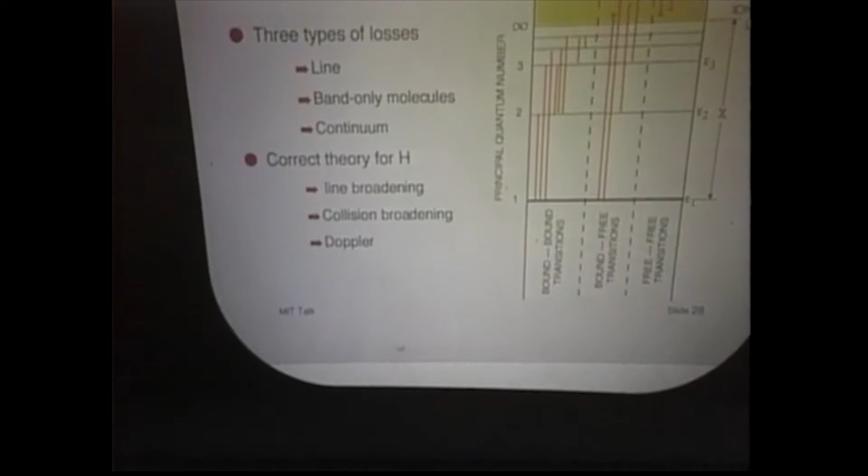Now, there is one technical point I'd like to quickly mention, which is a substantial limitation to this system: the radiative losses of the gas as it gets heated. When the gas gets very hot, it starts to radiate and emits power away. Eventually, if the radiated power exceeds the fission power coming in, you are in trouble.

It's a lot of work to calculate all this. There are types of losses: line, band, continuum. Remember that we only have atomic hydrogen, so the molecular levels aren't present. Essentially you're talking about theoretical hydrogen with one or two electrons, as in the Handbuch der Physik. Since then we know all the numbers, so all the calculations can be done very precisely.

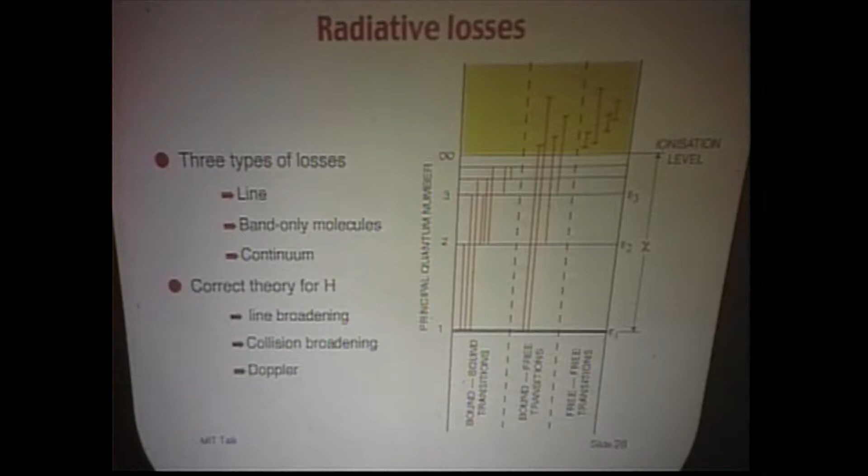It turns out that the radiated power — essentially the line emission — is quickly absorbed. The line looks black because the absorption is quite strong near the line, so there isn't radiation escaping. It's like the sun: when you look at the sun, you see the plasma, you see the lines dark. You don't see light coming out of them, so there's no radiation from the lines.

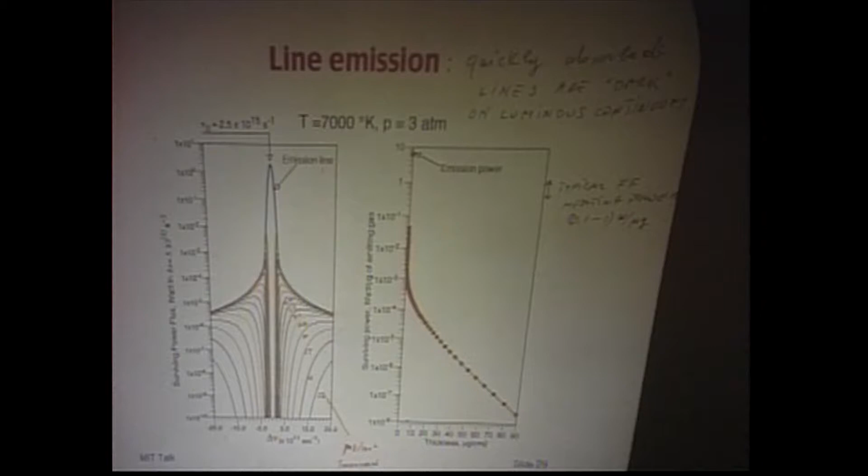There is, however, a substantial band emission, which has all been calculated. I'm not going to get into details, but essentially what happens is that the light grows with the temperature of the gas. This is frequency, and this is the power after a certain finite distance. It's becoming a lamp, a big lamp.

Here is the surviving radiated power as a function of the distance through the gas — this is about 1 centimeter of gas at 3 atmospheres. So most of the light emitted by the band is absorbed immediately in the region where it's emitted, and therefore it only contributes to heat conductivity.

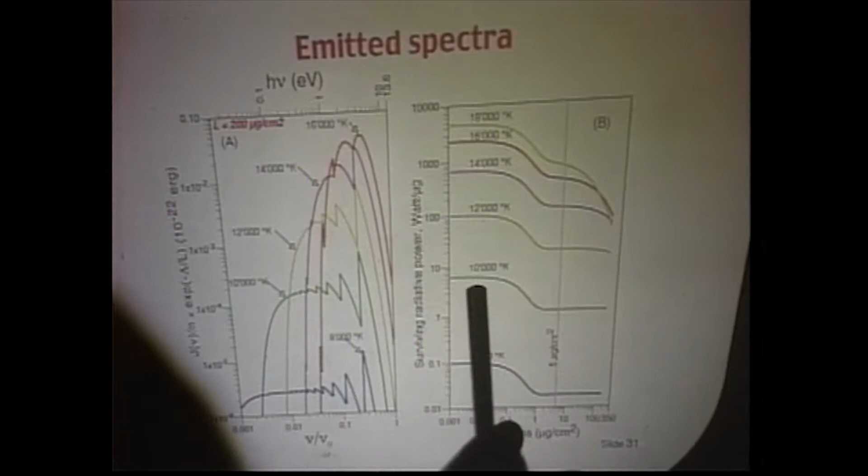But there is a substantial component, this flat line here, which has a very long attenuation path — this is the light you can see on the walls itself. This is all taken into account in the calculation, and it tells you that up to about 10,000 or 12,000 degrees you can operate; above that you have a radiation problem you have to solve.

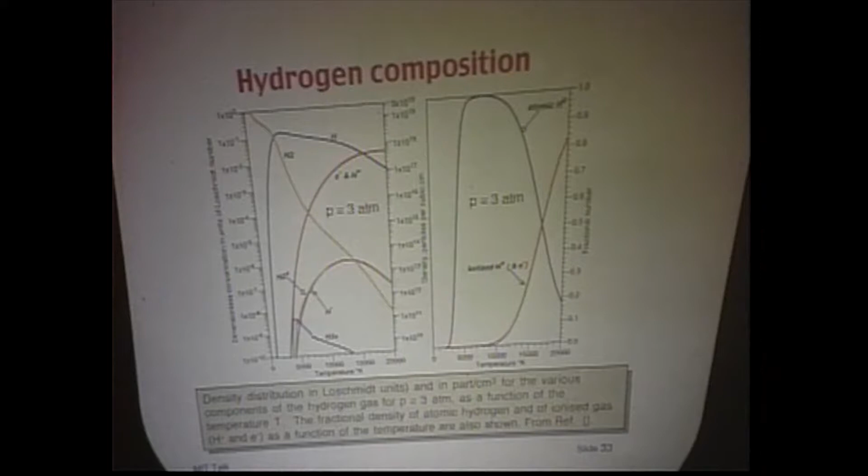It's a perfectly large cross-section. The recombination from molecule to atom is very slow. Remember, two atoms cannot make a molecule because there is no momentum energy conservation. So a single collision of two atoms will never make a molecule because they have to emit a gamma, and the gamma is not there at those temperatures. And therefore, the thing is metastable.

You remember the so-called hydrogen torch, plasma torch, in which you take molecular hydrogen and make it atomic hydrogen, and then you throw it on the wall, and when it hits the wall, it becomes molecular again because it finds the recoil, and therefore it gives you heat. In fact, you can melt a lot of stuff this way.

Now that is essentially what's happening in our case here. However, as I showed at the beginning, our gas is essentially frozen. In other words, we expected this gas to come out essentially as an atomic gas. However, atomic gas means A is 1 instead of being 2. And therefore you pick up a square root of 2 in the number, the speed of your gas.

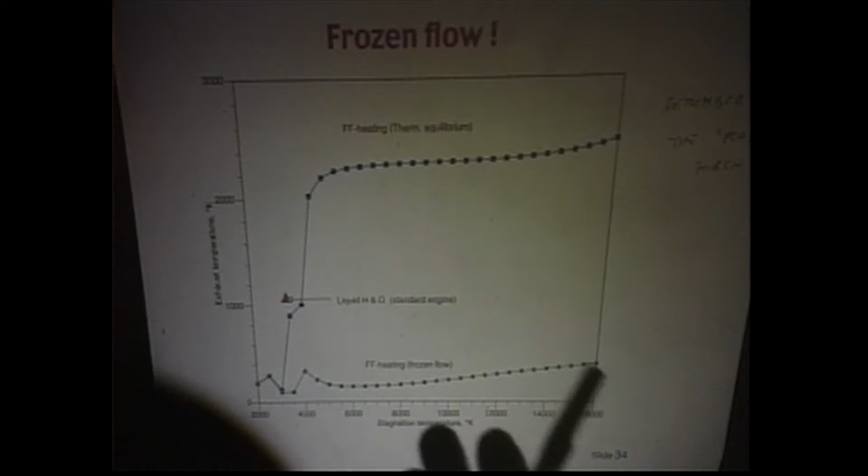Now, since we are in computer science here, let me tell you some computer simulation, so I'll make you feel a little more at home. So what we've done is developed a lot of programs which do the following.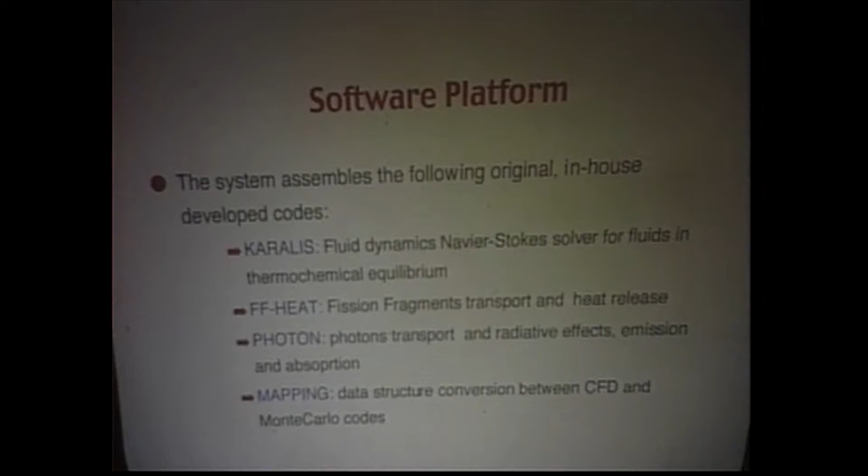This is doing fluid dynamics calculation. This is making the fission fragment transport heat release. This is worrying about radiative effects of the gas. And this guy here is combining the energy losses and energy radiation to close the loop with the program, which is the program on fluid dynamics. So this is a fluid dynamics program.

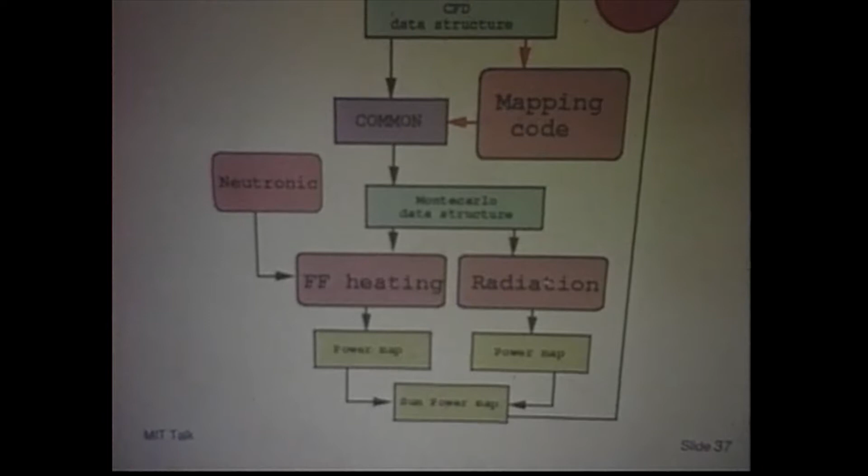Then it goes into heating from fission fragment with the neutronics providing the supply. Radiation, you lose power, you make power, you take a power balance and you put it back and you make recurrent calculations. And then we have done several models here with a typical 30 centimeter, 2.5 meter machine.

Simulation rather sophisticated. We have hydrogen inflow at 100 Kelvin, which is in fact uniformly distributed. And I mean, this thing is really horrible. And then you get essentially various intensity of flow. Let me show you some results.

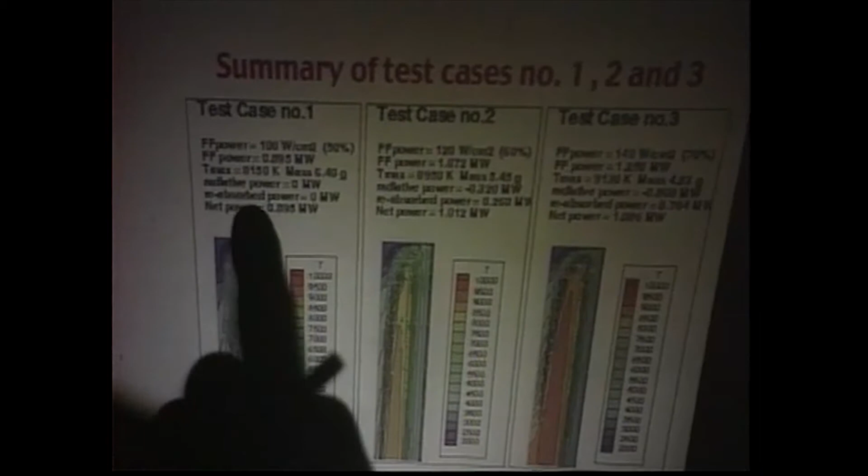Here, we are increasing the temperature of the heater. This is half of the cylinder. You can see there's another half coming on the other side. So you start from the wall here, and when you move on, you heat up the gas slowly until the gas gets very hot, and then eventually down here the gas is the hottest, and it comes out from the funnel.

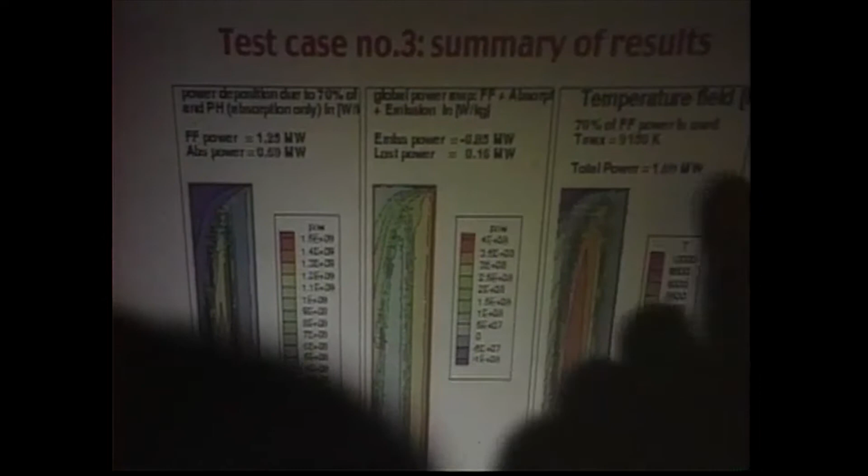You see the same thing here, case number 3, which is the one we consider the most appropriate, and you do get about 10,000 degrees out of that, and you do get essentially all the gas nicely hot at the end. So the fluid dynamics works extremely well in this story. Actually, you can see here global power deposition and temperatures, and you can see these kinds of calculations are perfectly adequate. So we have a good fluid dynamic model of this.

The heating process of the fission fragment in two dimensions is quite remarkable. Here we had 200 watts per square centimeter on the tube, and here we are collecting 900 watts per milligram, so we are collecting 900 kilowatts, so 1 megawatt per gram of the gas.

And you see here is the radius of the container. In the central part it's very uniform. These two lines correspond to the top and the bottom, where there is no coverage. On the bottom because you're going out into the nozzle, on top because there is nothing on the top. The americium is only deposited on the sides.

If you were to increase the pressure from 2 atmospheres to 12 atmospheres, then you will observe this: your fission fragments will just stop before they get to the center, and only the sides will be heated. A few more minutes left. I can describe some of the design considerations here.

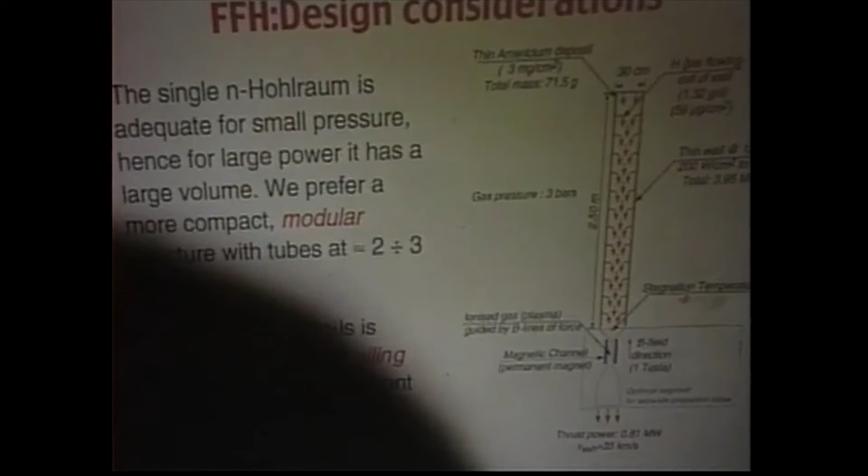This is the kind of tubes we're talking about, and this many tubes are inserted inside a box. Let's look at this. This is a realistic engine.

This will carry a mission, according to what Asi is calculating, over to Mars and back again in the way I was describing before. It's made essentially by a series of tubes, 2.5 meters long. Those tubes are equivalent to the fuel elements. They have the nozzle on the bottom, and therefore they can be clamped on a baseline, if you like.

They are immersed inside a sea of lithium, liquid lithium bath, which is the coolant, and this works as a boiling lithium reactor, if you like. The lithium is all around here, and it touches the outside of those tubes so the outside wall is cooled with this lithium, and the lithium is traveling all over here. There are control bars coming into the Hohlraum, so you take away the neutrons to control the process.

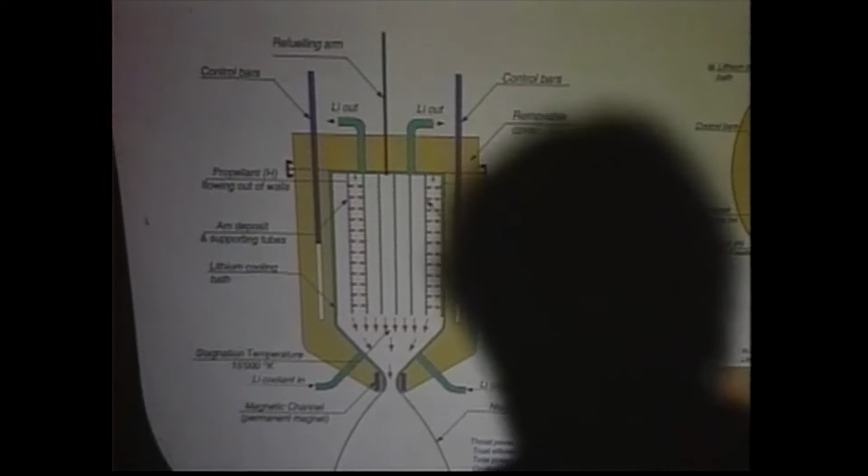The system is essentially a lithium-cooled system. You have lithium which boils. The vapor lithium goes to the panels, which are the cooling panels. There it condenses again, becomes liquid, and is recollected and put back again. So it operates at constant temperature, but there is the fraction of the heat which is used for the boil-off, which is used for cooling.

These are the numbers indicated here. We are talking about thrust power 30 megawatts. The overall thrust efficiency is 17%, 177 megawatts of total consumption. Exhaust speed 35 kilometers per second. Propellant flow is 50 grams of hydrogen per second. The thrust is about 2,000 newtons.

The foil power density is 200 watts per square centimeter. There are 88 square meters of americium. This machine will run with 2.4 kilograms of americium, so very little. The refueling time will be every 9 days. Every 9 days you go in there and put new tubes or whatever to get going. So we're talking about a few kilograms of material, and over 9 days you can get this power.

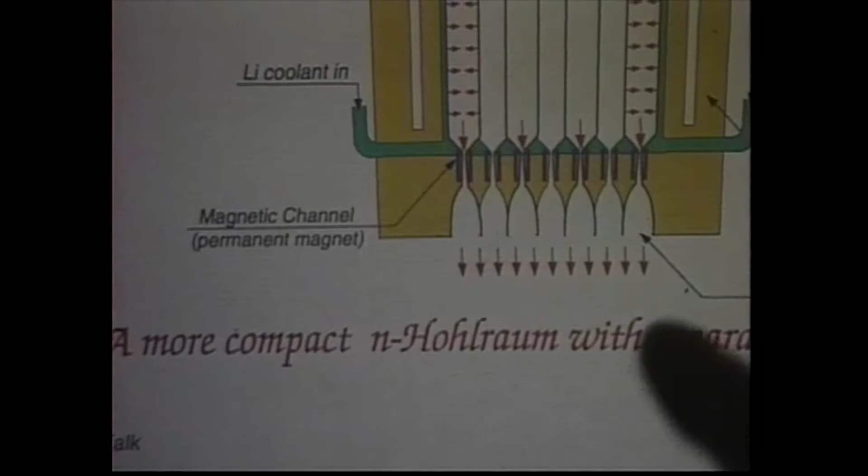This is sufficient to compound the mission. You will do the refueling not during the mission, but in the periods in which you are recovering. So it's quantized in a proper way. The other way of doing it would be a Katyusha type of thing, where each tube is blowing separately, but that is a question of technical design.

Now, obviously, this is an idea. As I said, all ideas have a chance of not working. This one certainly has a very high probability of not working, but it's still fun worrying about. First of all, the behavior of americium under extensive exposure to hydrogen is the problem.

The good news is that the Nerva engine also has hydrogen and also has a fuel—not americium, it's uranium, but they're very similar chemically—which is in contact with hydrogen at high temperature, and it doesn't go away. The bad news, of course, is the deposition is thin. In the case of Nerva, you have a piece of solid rock.

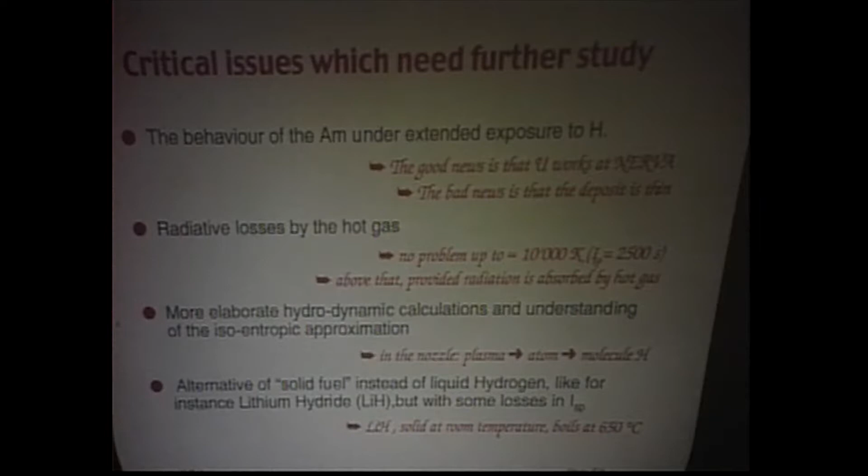The other question, radiative loss for the hot gas, still needs experimental work. Below 10,000 degrees, there is essentially very little to no radiation. If you want to go above that, the calculation is one thing, the experiments are another. You've got to do something about that.

Now, hydrodynamic calculation, obviously, is the more important point. There we have questions like transformation in the nozzle from plasma to atom, and atom to molecule. When it cools down, you have to understand what it does—it's frozen flow, etc. Also, other possibilities are, instead of using hydrogen, you could use any other material.

One interesting material to use would be lithium hydride. Lithium hydride is a material which is solid, at 650 degrees it boils and becomes liquid, and then you can throw it into the system. It looks like a solid fuel instead of being a liquid fuel from a practical point of view, so you get less thrust, but you have the advantage of not needing to carry enormous dewars.

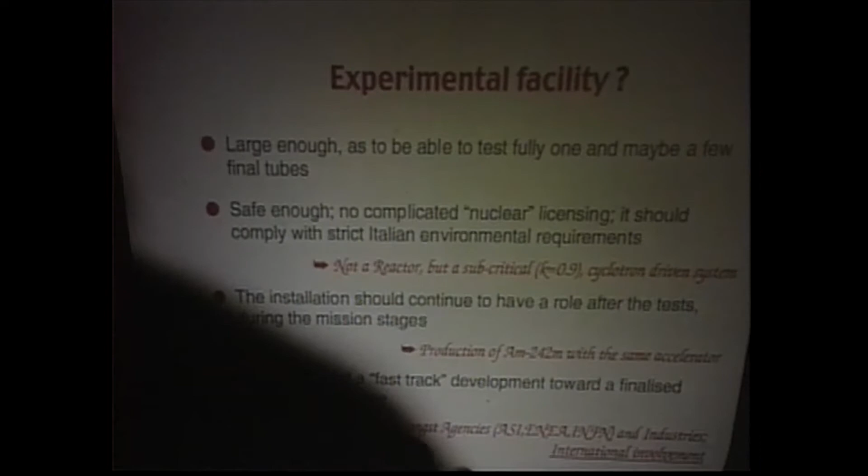Eventually, in a 5 to 10 year period, we'll have to do some testing. So we're talking about a test facility which should be large enough to test fully, or maybe a few final tubes.

Now, in Italy, and in particular also in America, everywhere, every time you say reactor, everybody gets really up in arms, says, my God, you don't want to do it, etc. So we decided that we could also do it with a subcritical facility.

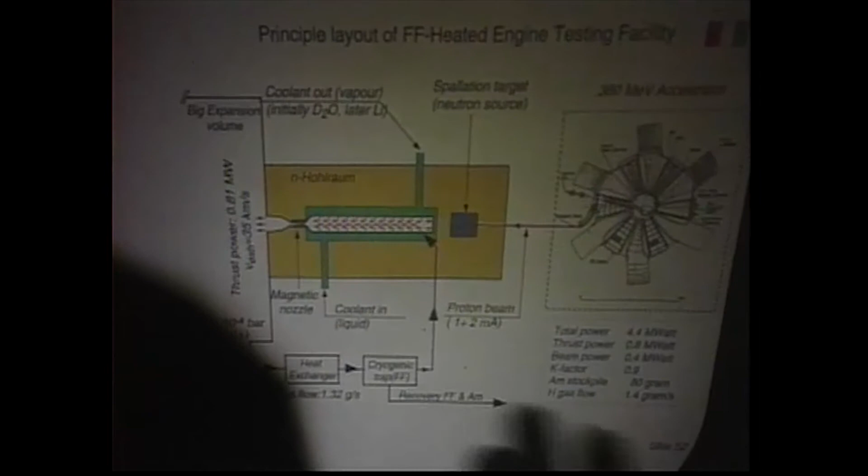It can be done. The hohlraum can be fed with neutrons, also from an accelerator. This type of thing will also allow you to produce americium after that, and essentially would allow us to go the faster track. The idea is to take one of these tubes, 2.5 meters long and 40 centimeters in diameter, and that will give you about a megawatt of power.

And the exhaust speed will be 35 kilometers a second. You can put that in a hohlraum, which can be made, for instance, with D2O initially. Eventually you can go to lithium. The supply of neutrons will be provided by an accelerator, which gives you some neutrons in there. Then you blow this in the tube, and you collect the gas. There's not much gas, only 1.32 grams per second, so you can pump it, freeze it, and recycle it. That could be a model of taking one of these tubes to make it work. And if you understand one of those tubes, you can do more.

Now, obviously, we were talking about engines capable of doing manned missions, but you don't have to do that. You can use one tube or smaller devices to carry instrumented missions. There are lots of instrumented missions you could do with 10, 20 tons of initial load, rather than using the 100, 150 tons required to get a man on Mars. There are interesting things, like the story about Europa and so forth, to get into with this device.

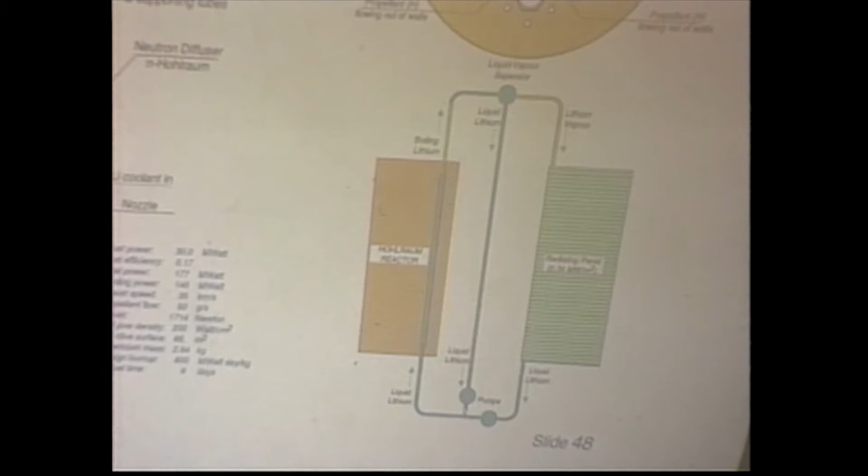What I was saying here is that we have liquid lithium inside this device, here, and the lithium boils. Boiling of lithium produces, like in a boiling water reactor, a boiling lithium reactor, vapor of lithium. The lithium vapor is separated here - you separate vapor from liquid. The rest of the liquid comes back and circulates again into this volume, and the gas is sent to the radiating panels, which are panels put all around the engine, and which operate at about 1200 degrees, so they give you about 300 kilowatts per square meter, something like that. So they are about 1,000 square meters, something like that.

And they are essentially foils in which the lithium enters as a gas. It condenses on these tubes, and then it comes back in terms of liquid. The problem we have seen there is that meteorites may punch a hole into those walls.

It may happen, and therefore you have to have a system that is sufficiently segmented. Ideally, you have some kind of valves or whatever which avoid that kind of phenomenon. But at a temperature of 1200 degrees, getting rid of the heat is not an important problem.

Don't you need some electricity for emission? Yeah, of course, this is absolutely right, you are in this present approximation. I'm saying this heat is waste, but in reality, having 1000 degrees temperature, it's not a bad thing to use to do all kinds of different things with it. All the support, energy and transmission, whatever, it will all be taken out of that.